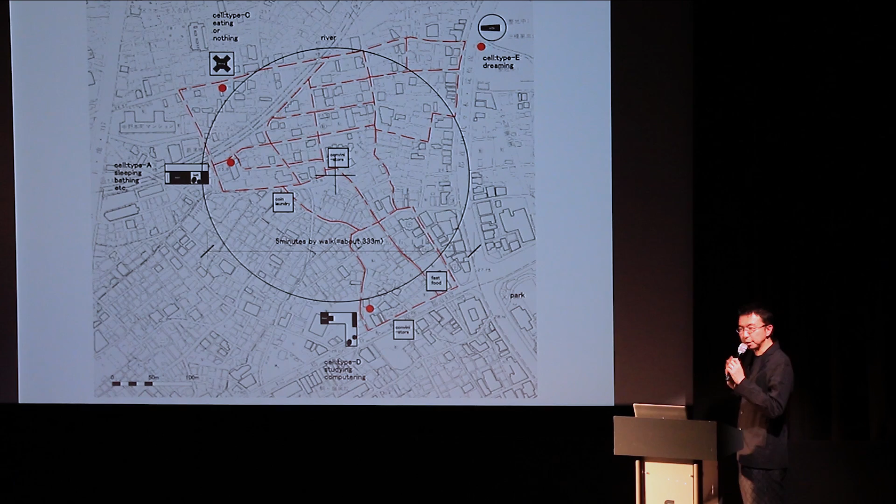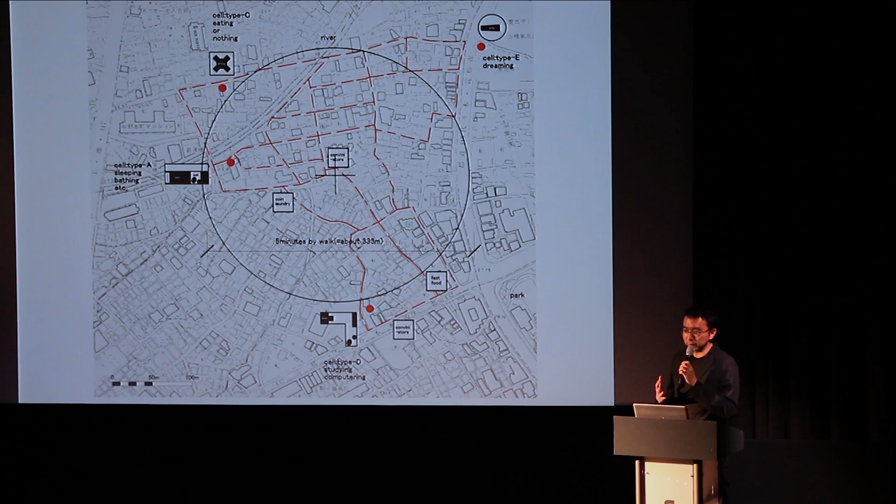And this is the first project. It is really conceptual, and it was designed in 1997, I think, to think about a new concept of the house. And you can see, simply, we can say, live in the city, or the whole city is a house.

This is the map of Tokyo, and the place where I was living around that time. It's just out of the Shinjuku area, and you can see residential areas with many, many small timber houses with such winding small pathways going around. And the concept is very clear.

You have not one completed house, but the house is fragmented, like a Moriyama house, but scattered throughout the whole city or neighborhood. This is, I think, from here to here, about 100 meters or 200 meters, something—so it's completely walking distance. And then some area you have just a dining room, and some areas the study areas, or some bathrooms, or some other things.

And of course, not only your own small places, but you can use the small shops or small cafes or anything you like throughout the whole city. So your life is like, of course, waking up somewhere.

Maybe this one is bed, I don't know, already it's more than 20 years ago. But woke up, for example, here, and then take a shower here, and take to work, to think about architecture here. But the important thing is walking around in the city during your life.

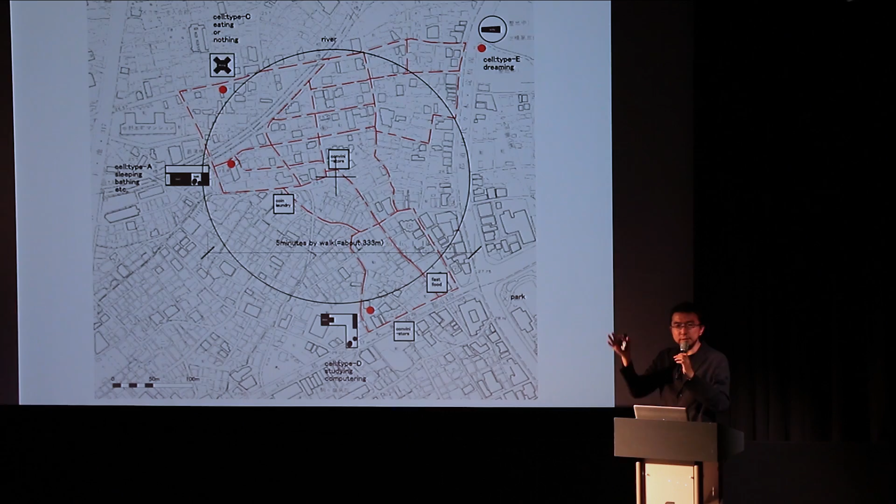But of course, during walking around, you will meet some people, and not only friends, but some other people. So the house is not defined by one object or one boundary, but it's more melting into the city. So that was the very, very basic concept.

And actually, at that time, this kind of thinking was not completely new, because Toyo Ito already talked about a city like Tokyo being like a house or place of life. And then you saw the small, like a PAO, small furniture-like spaces where Sejima-san was there in the photos. It was like the concept to live in the city without such strong enclosures. So I was, of course, influenced by that kind of thinking.

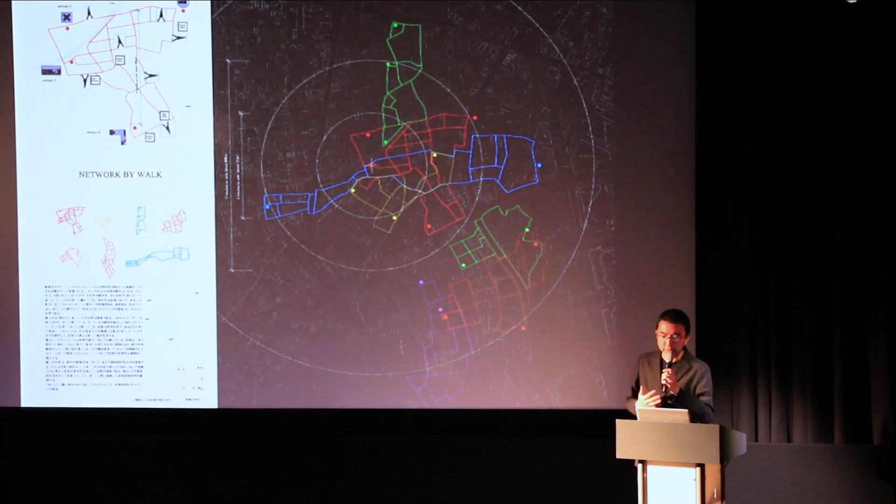But at the same time, I got an inspiration from my actual life, walking around in the city, small pathways. It was part of my life, and I felt it's kind of a nice, cozy feeling. So that was the very, very first, and this one is the concept.

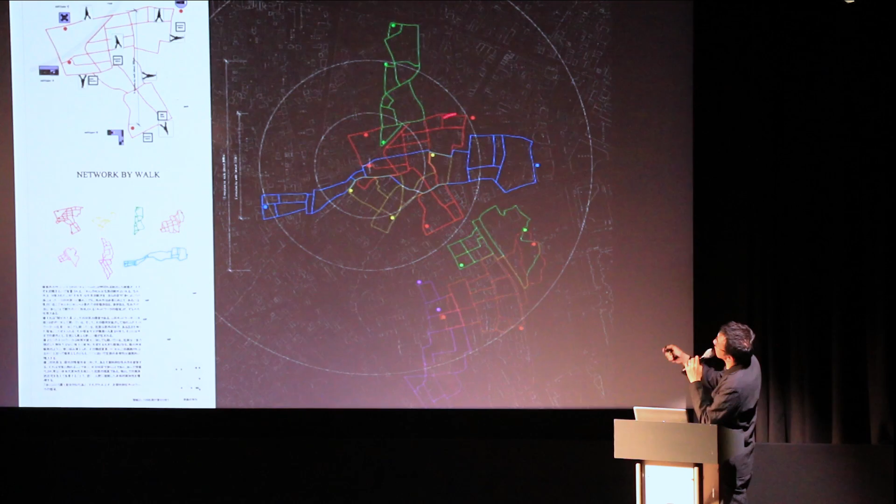Each different color means each different house. Red house, this place, and then of course, the walking pathway should be much more almost undefined. But I just drew it in different colors. These blue guys, like this.

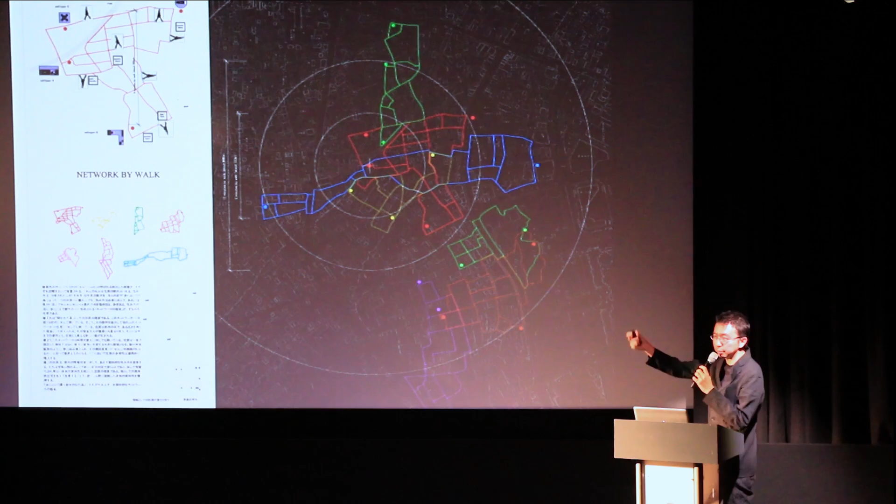If you have one space, another space, and then some other space here, then your house is really extended into the city. Because Tokyo City's residential areas are quite intimate, and within walking distance you can have almost everything. So this kind of thinking was possible.

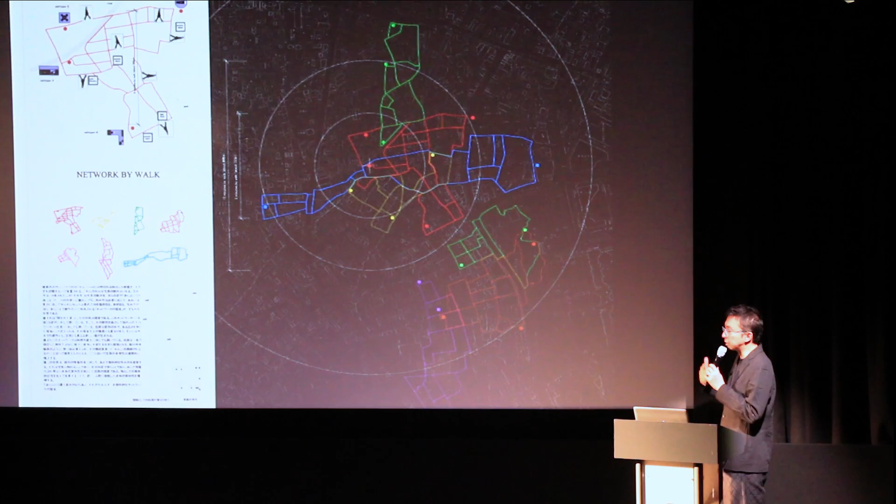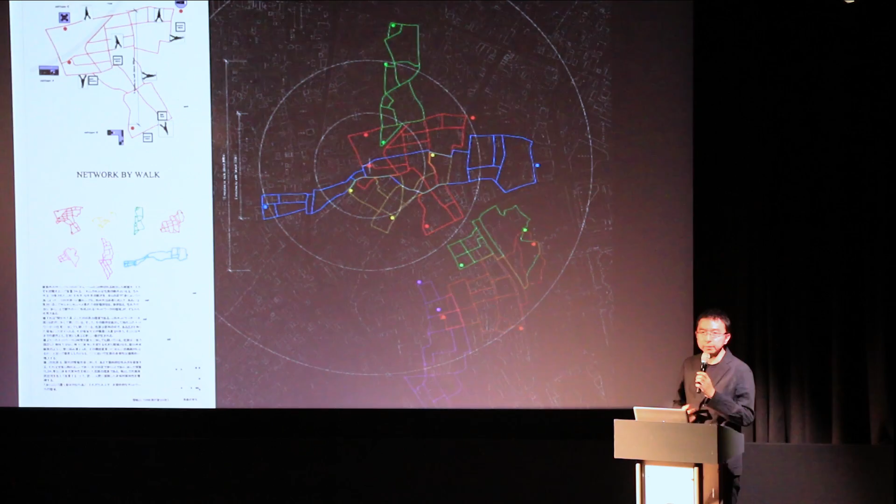But I tried to extend the idea of the house to the limit, I think, to where the architecture is not anymore and is melting into the city, or how we can redefine the place for our dwelling. So this kind of conceptual thinking was happening there.

As I said, even the street is quite cozy, surrounded by many daily stuff of other people. So the atmosphere is like you are not going out of the house, but get out of the room, while still walking some part of your house.

Especially, it was a great contrast to my hometown in Hokkaido. These are really cold places with heavy snow. So once you get out of your house, suddenly the strong nature is there. So the contrast between inside and outside was so strong in my hometown. But in Tokyo, the climate was more mild, and the scale between inside and outside is not so different. So that is why I started to question how to make such blurring boundaries.

And of course, it is from the traditional things. As you know, we have that kind of layering in between spaces. People call it engawa. It's like layers with no strong boundaries. The boundaries, like paper sliding doors or canopies, indicate kind of boundaries. Sometimes really thin frames are making the boundaries.

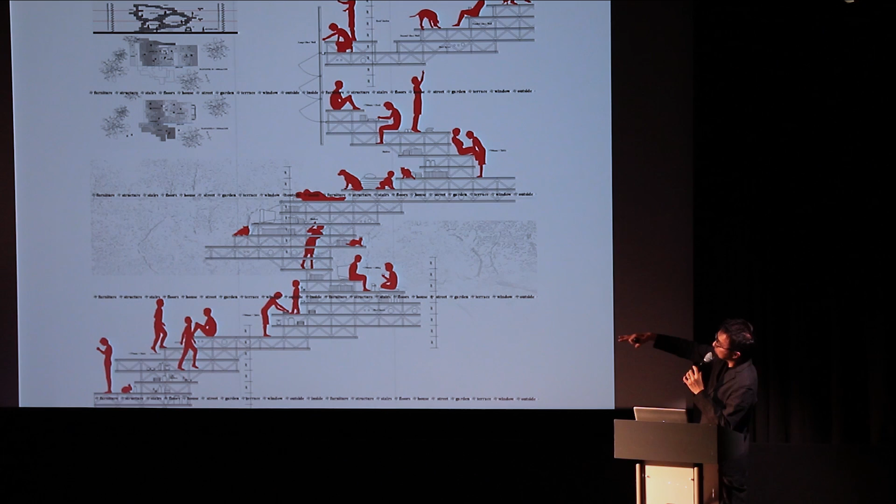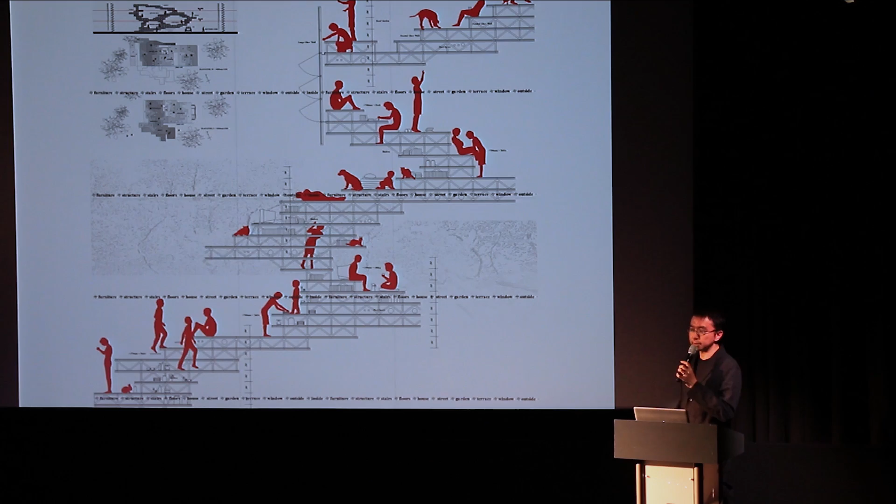Everything is like, at that time, 35 centimeters. And then you sit on it, or you use that size as tables or shelves. So there's no clear function, but you can find every different kind of function within the interactions between your body and the spaces.

But I realize this is only possible in cultures where you take off your shoes and step onto the floors. You can see this is tatami floors, and people sit here. This is a table, but they also put chairs, and then put some other tables. So you already have multiple levels, and mostly the floor is floor for walking, or nobody stands on it because this is a table.

But you see those multiple layers of levels could work sometimes as a table, sometimes as stairs, or sometimes as benches. Then I felt that is quite a simple re-understanding of the Japanese traditional systems, but could be something beyond normal functional architecture.

And this is one of the scenes from a Japanese film. You can see they are sitting on the floor, she's sitting on a chair, and she's sitting outside. So those kinds of natural, multiple layering behaviors are happening.

Or sometimes, yeah, could be lying on the floor. So for us, the multiple levels of your house, once you take off your shoes, then it could be more flexible in a sense. So those kinds of thinking inspired me to make this house.

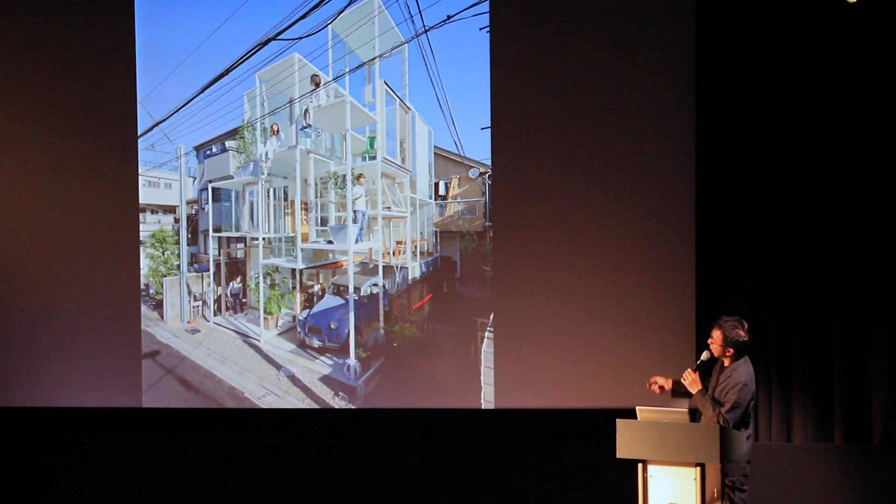The plot was very small, as you can see, almost less than 6 meters by 9 meters, or more or less. The clients, of course, understood this is a super small plot, so a normal house doesn't work. So how to deal with that?

At the very beginning, we just chatted about their lifestyle, what kind of life they do. They said, casually, not like a serious talk, that they are like nomads in the house - not in the world, but in their house. They were living in a typical apartment with dining spaces, living spaces, bedrooms, or something like that.

But they said they don't care so much about the name or function of the rooms - they just sometimes choose one corner of the dining space to read magazines, or some corner of the bedroom to find their place. And I thought, wow, this is a really flexible, nice way to live their life, much more free from the plan of the house.

So I thought, anyway, this plot is quite small, so we can just give up on the size of the spaces, but we can try to achieve varieties or diversities of the areas. Then they could choose as they like - just a small corner for some purpose, and a different corner for something else. If you have varieties, then the house for them could be much richer than the size suggests. So that was the very starting point.

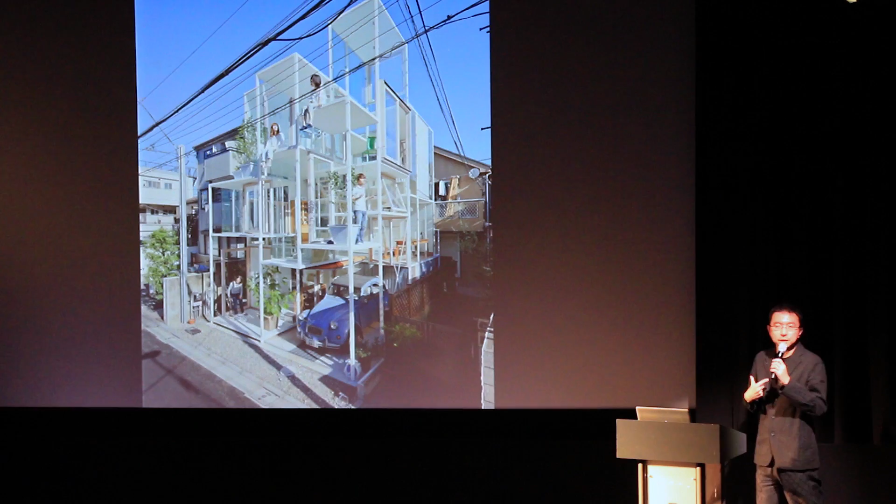And this house itself, of course, everything is small, but many floating pieces are creating your territories. In that sense, this house is not only talking about the physical relationship of the space under your bodies, and not only about the functional or something beyond function, but also really relating to the urban context of Tokyo, like a translation of the city of Tokyo into the building.

So that is why, even from outside, you will see it, and no other houses are like this, but you feel, wow, this is really like a Tokyo feeling.

And this transparency is a bit too much, I feel, but the clients like that. So sometimes the client is much more aggressive than the architect. Like the Moriyama house, also a huge inspiration to Nishizawa-san, I think. But in this case too, the first conversation inspired me to think about those multiple level houses and those transparencies.

They also talked about the openness, and of course we could put some walls in some areas — the western areas we have more walls to block the western sunlight. But then we talked about, yeah, we could have more walls if you like, so however much you like, and we could make a good balance.

But they said no, this kind of openness is very nice, and even the bathrooms could be almost open — but the bathroom means showers, not only the toilet spaces. We put it in boxes, but we didn't show it in the models. We have one layer of the box, the storage and the toilet, on the very back of the house.

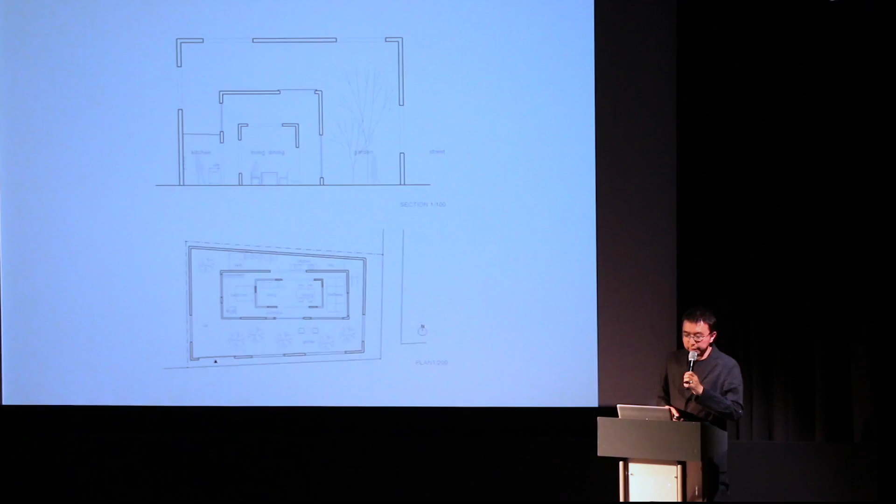And finally it was like this: just 3 simple boxes. Big box, middle box, and small box. This is a plan, and around here is outside. And then the section is also like this.

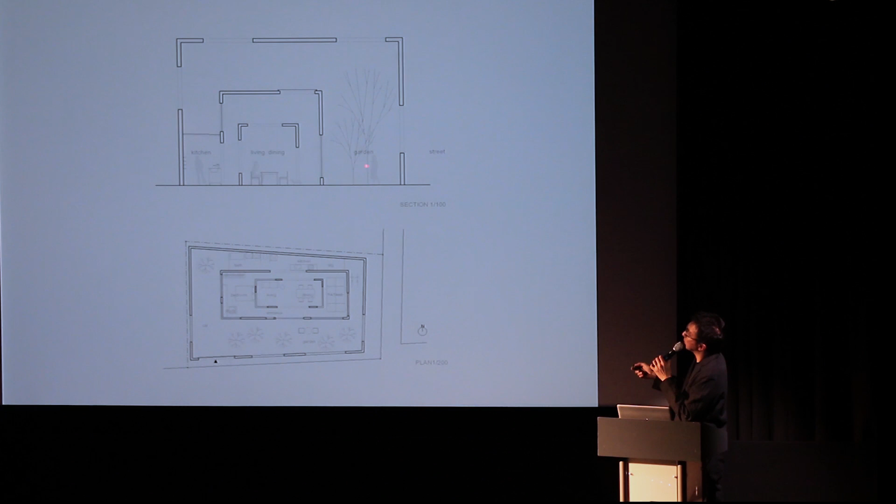This section is really amazing, I think, because normally this big box is not necessary. You can live within this box. But if you have this big box, then of course the garden is here, but the garden is part of your room, a larger room in a sense, but really open, larger rooms. And this inner room is also not so necessary. But if you have those kind of 3 layers, then you can have amazing feelings of varieties in your house.

So we proposed - okay, the house, garden, it's okay. But if you enclose everything with one more skin, then you can feel your gardens more within your territory. Sometimes the garden itself is part of a larger, or the largest, living space. And if you like to get more protected, then you have 2-3 layers to protect you from outside.

And this is a view from the outer layers, already enclosed by the big box with many openings with trees, because this is outside. And then you see the second box and the third box inside.

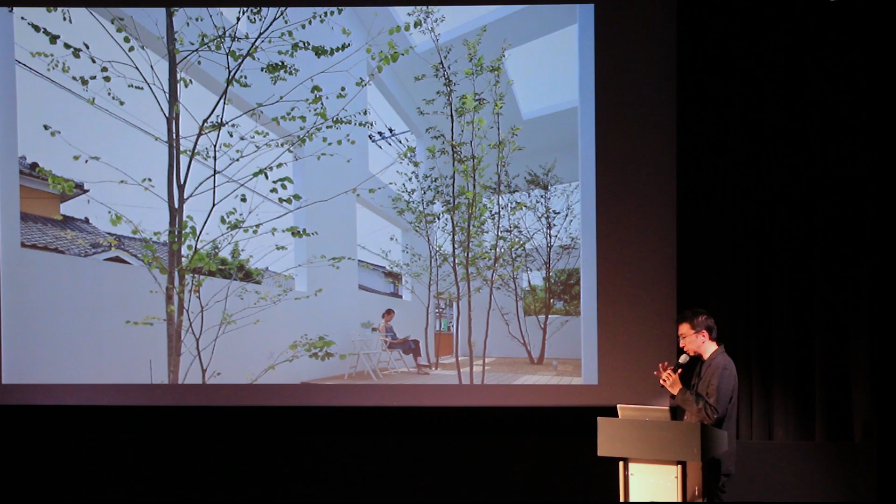You can choose in your life how much transparency and opaqueness you need. Again, this is a space inside of the big box, but outside of the middle box, so it is outside. The layout of the openings is carefully designed not to be too open to the street and not too open to show neighbors' houses, but taking in the neighbors' greens, and then to open to the skies. The treatment of the boundaries is quite fundamental.

So in a sense, this house has no plan, just a box and box and box. No plans, we just design the boundaries. But if you design the boundaries, then the whole space for your life could emerge from that. Of course, we can say the concrete box is making your house, but at the same time, we can say the thickness of the air is making your house. The wall is not just an object as concrete, but the thickness of the air is making your wall. And the air, and the openness and closeness, is really dynamically changeable. So in that sense, this is really close to the traditional Japanese house, but at the same time really questioning not only the Japanese traditions but the whole fundamental question of architecture or dwellings, how to open it and how to close it.

When I got the commission of this by telephone, I was so excited because they said, this is just a small thing, so I'm not sure you can get it. You'd like to get it? Well, what is it? And they said, the public toilet. Wow, this is... and how many toilets? Only one? That is kind of an extreme situation.

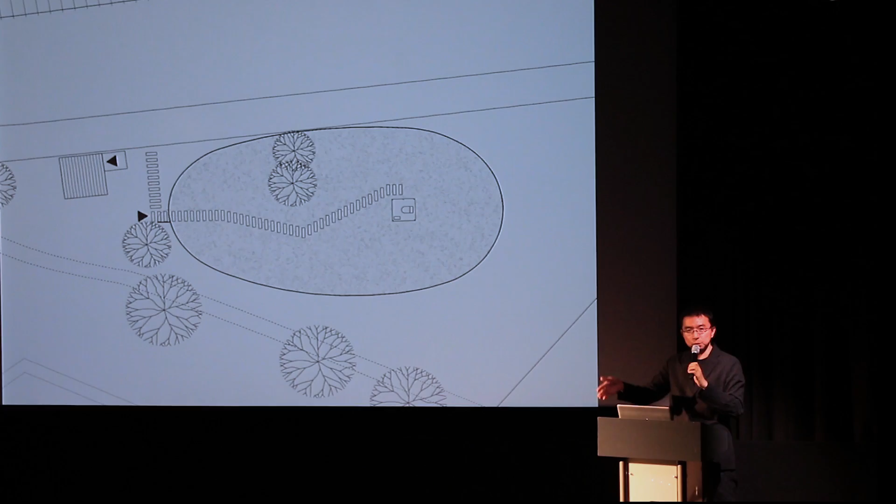Normally the wall blocks the view and blocks the air at the same time. But if you can separate the meaning of the wall, blocking only the view, blocking only the air, then this black wall is only blocking the view, so the air is continuing. And this glass wall is only blocking the air, to make a minimal shelter for the rainy days or something, but not blocking the view, so you can have the view. The important point is to make distances, like the previous project: three layers of boxes, box and box and box, but with distances between them, then you can have spaces.

In this case too, the functionally different walls could have distances, solving those impossible requirements like blocking the view but enjoying the view to the surroundings, or making it public but really private. Those kinds of contradictions could be solved by such an intellectual method. And then finally, it's built, and it works very well.

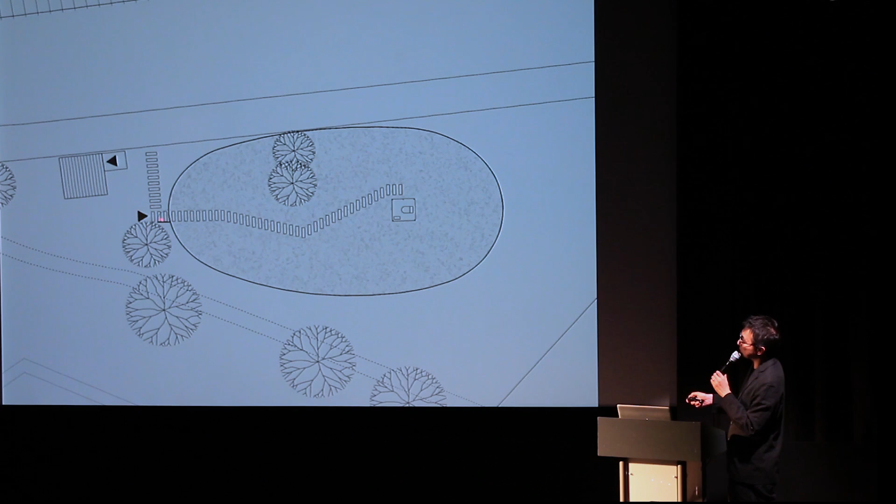Of course, in really emergency situations it's a bit tough, because you finally reach the door, you open it, and then you still have 15 meters to run. But most of the time, it works.

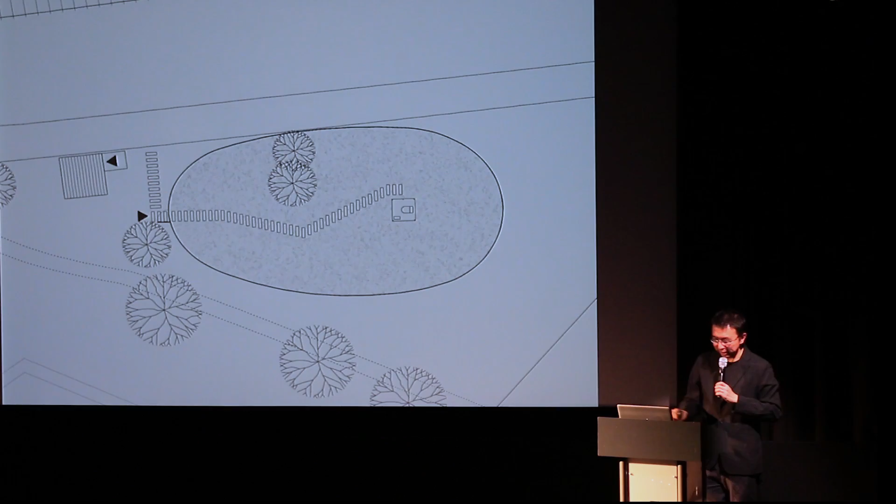We kept the existing trees and made this garden as natural as possible, not too fancy, to create a nice continuity with the surroundings. But it's really a public toilet. It was done five years ago and it's still there, but it was made like art. The city itself promotes itself through art and architecture, which is why they asked me to design this small toilet.

Every year they hold an art event in the springtime, and in the first year, because of this crazy toilet, the place became really popular. Many people came on huge buses, not just one but two or three touristic buses, parking behind the walls and making a long queue, not for the toilet, just to take photos, sit inside, and take selfies, like a touristic place. It was nice, and the city people were so happy.

But sometimes people on the bus whose next destination was the toilet thought, okay, it's next to the toilet, so I'll use the toilet. Arriving there, it's actually a toilet, but there was a long queue only for photo shooting, so they couldn't use it. They got a bit angry because this was supposed to be a toilet, but they couldn't use it as one. They complained to the local government, and the city government people thought, wow, that's a big problem—how do we deal with this?

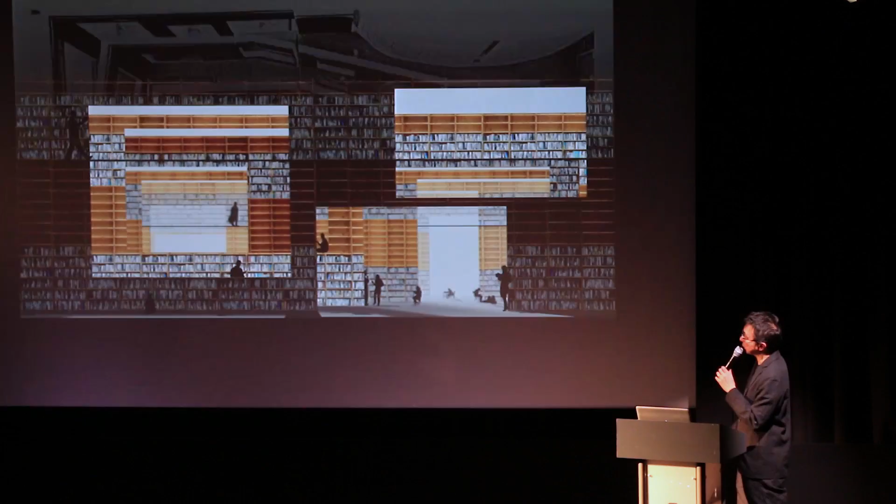This library is also about boundary things. It's made entirely by bookshelves—everything is bookshelves. This is for the Art University in Tokyo. The bookshelf spirals to grow and create places for people. Finally, it's a 6,000 square meter library made only of one continuous bookshelf. The important point is it has many, many openings again, like the House N, the box and box and box house, because with these openings you see the next spaces, like a layering.

I thought, of course, a library should really be a functional space to find and read books. But at the same time, I personally felt the library could be a space where people can just meander, walking around like in a forest, for unexpected encounters with unknown books or to get unexpected ideas. So on one hand, it's a super functional library, but on the other hand, it's almost a space beyond function, a place for imagination. How to integrate both of them was a very interesting topic for me.

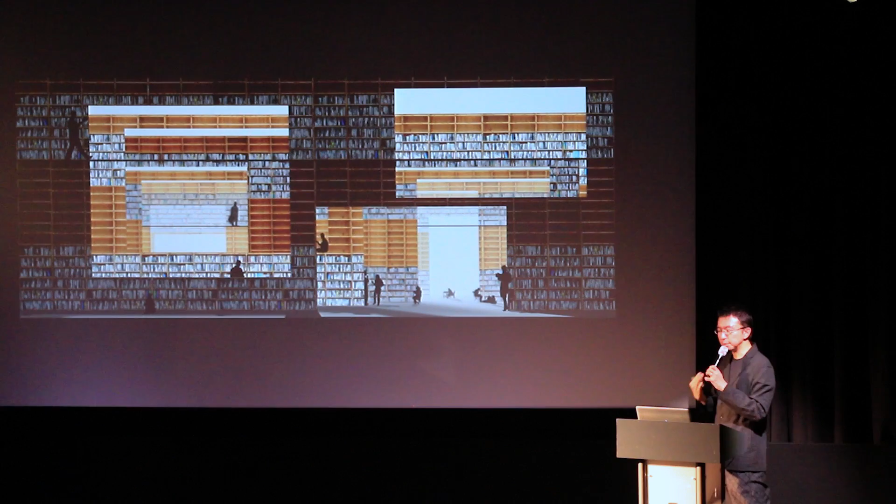I thought about a forest of books where you can walk around. The layering of bookshelves with many openings lets you see the space behind, and behind that, but you can't see everything—only limited areas are visible. You understand something is behind it, but you don't know what it is. This creates curiosity, invitation, and expectation, making you want to start walking around.

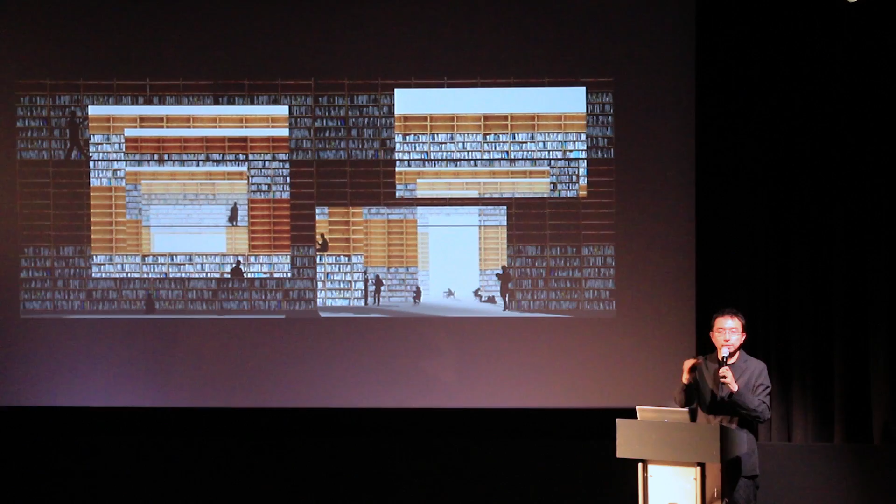But once you step into another space, you see another layer, and almost endless layers. Those endless imaginings, curiosities, or expectations could lead you to walk around almost endlessly, like in a forest—because in a forest, you feel it spreading, but you don't know what is happening behind those trees.

That is why you're walking around. So those kinds of sequences of curiosities should be created by those layering systems. And then this is the model, 1 to 20 model. It's a very huge model.

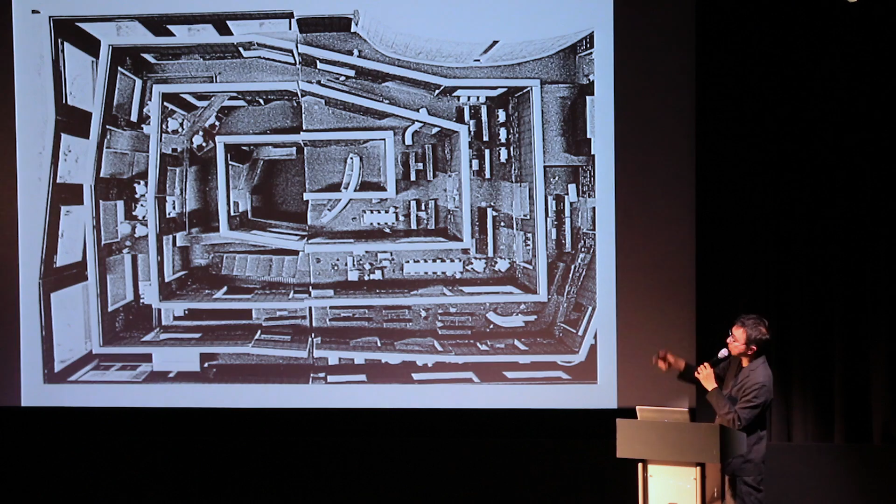Functionally, of course, the layout of the books is quite systematic. This is a central counter, and then it's like a clock. Each category makes those kinds of layout. You quickly understand if you look for books on art, then that direction is the art books, and you start to follow that, or the literature or architecture or something. Everything is really, really well organized.

But still, it's like a labyrinth. So if you don't care so much about the categories of the books, then you quickly start to be lost in the spaces, in a positive meaning. And then finally it's made so that it's not dealing with boundaries inside and outside, but it's almost like endless boundaries. No outside, no inside, but it's like relative boundaries, inside here and there. But if you are there, then there and over there is happening.

And the ceiling is really nicely done with really cheap polycarbonate materials, to make a beautiful contrast with the timber bookshelves and natural light, and almost like a phenomenal existence of the surfaces.

And seriously, I like to say those kinds of comfortable feelings are made by this system of the spiral, because the space between those two walls is almost like 4 meters something. So it's rather like a residential, cozy scale, cozy feeling.

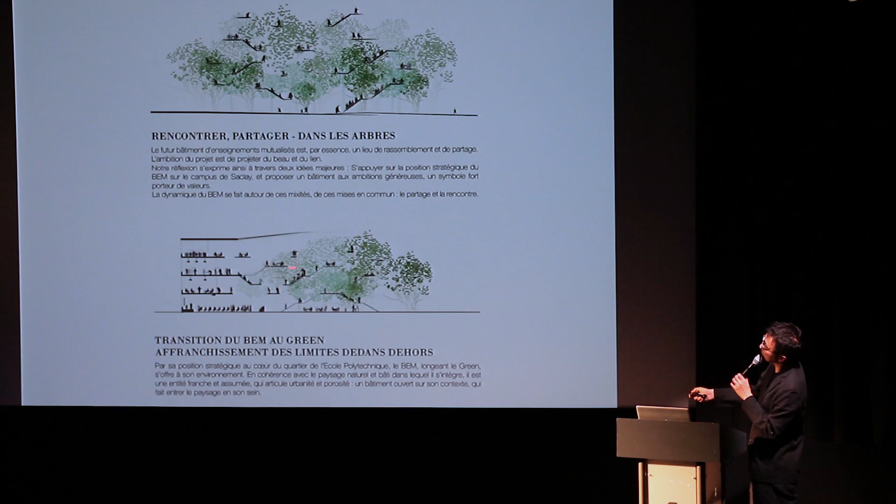And this diagram below is getting more to reality because they request many classrooms. So this is the classrooms, corridors, more open areas, and then it starts to get more random. And then we have more trees, even inside we have trees. So it's almost like melting into the forest. And in the forest, you can be more dynamically communicating.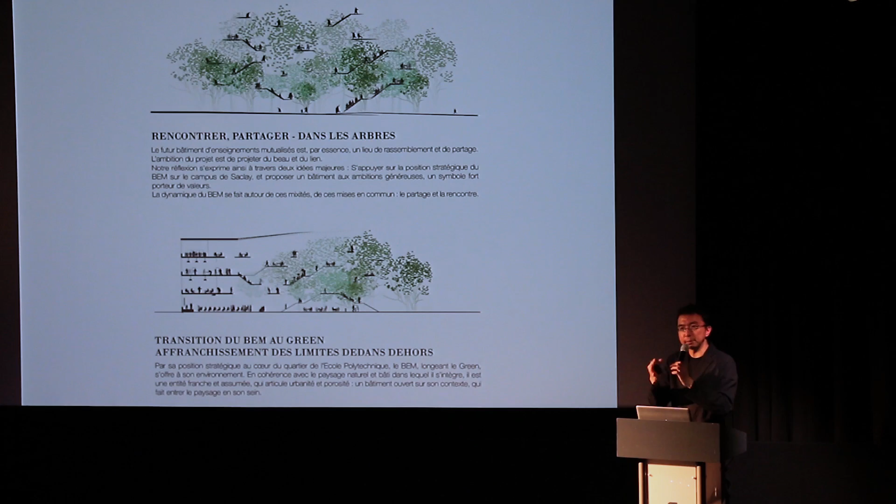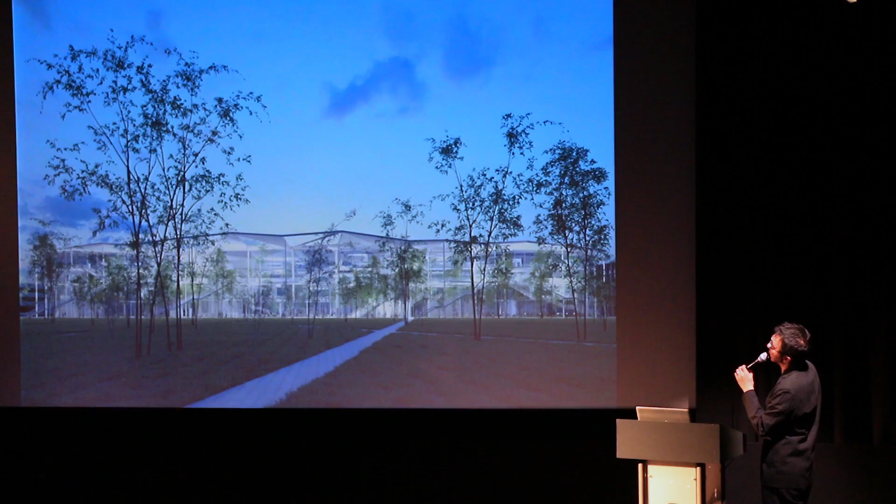So this is the actual sections. Conceptually it's almost the same thing happening. From outside, it's like this. But you will see how they need so many normal classrooms, so we put it there.

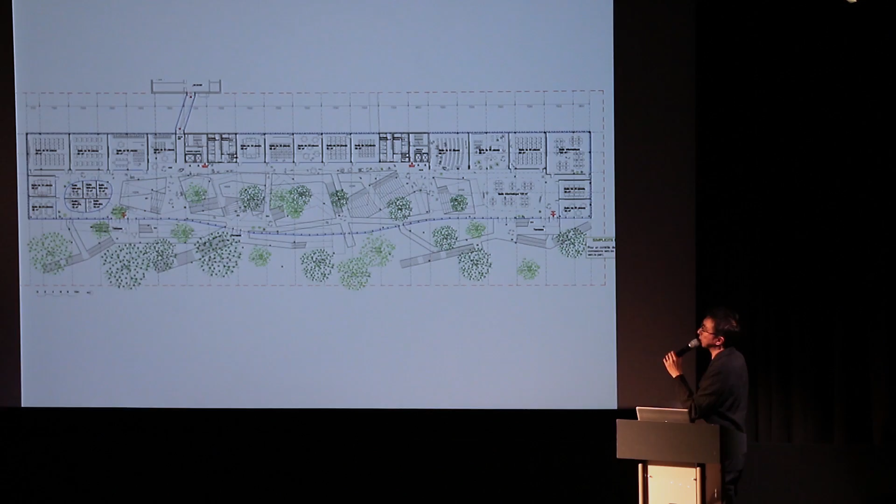And then we proposed those kind of circulation areas. All the circulation areas are like floating platforms and flying catwalks, and then big staircases like the floating auditorium. And then again, vertical relationships, horizontal relationships happening like this.

This is now the last phase of the design, and hopefully we can start construction within this year. The size is almost 10,000 square meters — not just 10 times, but much more, almost 100 times or something. But still, how to think about the relationships of the people, or the spatial layout, and how people's experiences could be related. In that sense, with different scales and different programs, we can still think about the continuity or consistency of the concept.

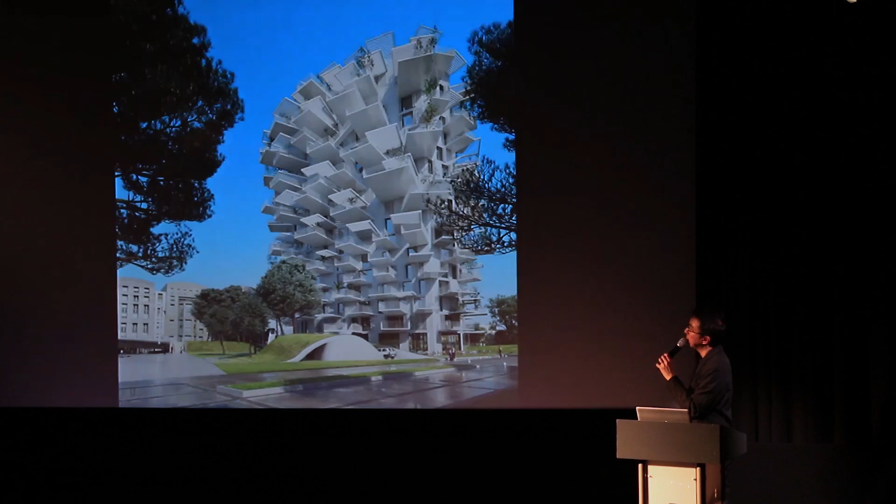And this is the housing project in France too, in south of France. It's like a crazy monster of balconies, because this is the south of France, so the weather is so different — warm climate — and even in the winter time they could have lunch on the outdoor terrace. That is something so different from, for example, Tokyo situations.

So I tried to imagine what life is like in those really nice areas. And then finally we thought, wow, a huge terrace should be there. But how to do it? And finally we put huge terraces on the apartment. That's quite simple, but it works.

This is alongside the river, 50 meters high, with 105 apartments there. This is the plan, the site is like this. So we simply respect the green belt going through the site like this.

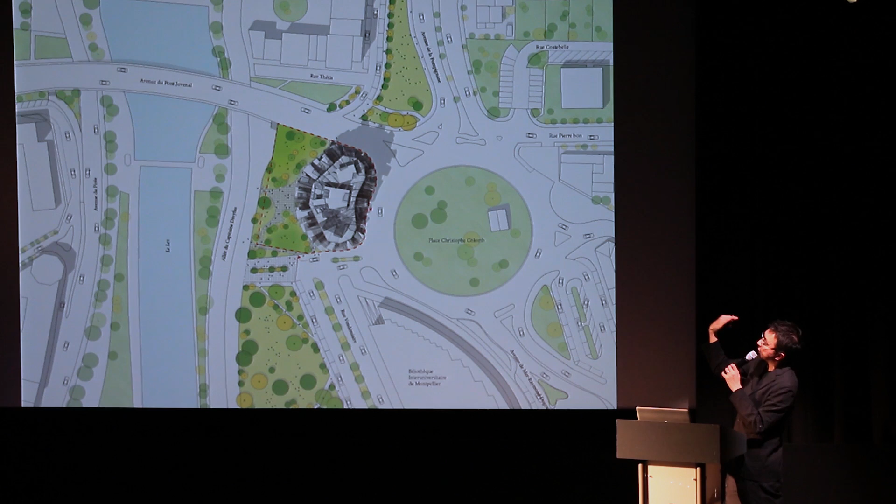So we push the buildings more onto the roundabout, and we try to respect the view of the existing buildings as much as possible. So we push this angle in and something, and finally we achieve this kind of strange shape. And we didn't know how to deal with this strange shape.

But we got the idea to put huge balconies all around these volumes. Of course, it's quite like a normal typology, an apartment with balconies. But if you have the proper shape and a strange proportion of huge balconies going all around, then based on such a normal typology, something really different, something really new could happen. That is the point I love this project very much, because it's quite normal, but it's quite extraordinary — anchored to fundamental things, typologies, yet something different.

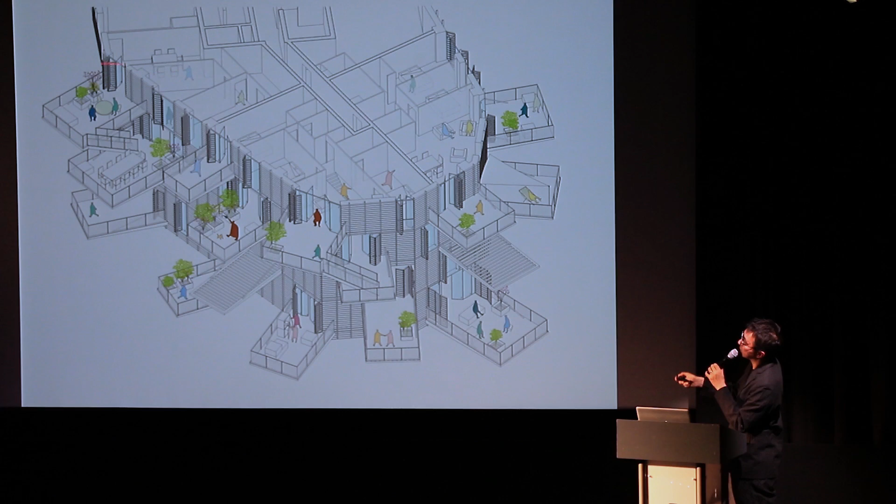And you can see sometimes the apartment is a duplex, two levels, and the balcony itself is two levels, connected by a staircase. So it's really like a three-dimensional living environment. I don't know how my former works are influencing this project, but you can see — this is now under construction — after completion, the building itself will be very beautiful, I could say.

But the much more beautiful thing is life coming out onto these terraces, parasols, furniture, and all of those daily stuffs, the stuffs of life, are covering these architectures. And then finally, the architecture steps behind, and all those kinds of three-dimensional high-rise filled with life could be there.

And that is the point really amazing things could happen. It's like the Tokyo street. The street itself is just one line, but you have many, many things coming out, like life is coming out. And finally, it is making the living environment. So in that sense, I feel there is something consistent.

I really like to respect the local conditions, the climate, cultural background, and lifestyle. Based on such local conditions, it was something new for me. I try to get inspiration from that kind of new thing, try to understand it, and try to translate it into architectural forms. So that attitude was very much the same. When I came to Tokyo, I was surprised, but I didn't want to say I don't like Tokyo or this is crazy. I was curious. I like to understand, I like to respect, and then I could have something for me to retranslate into architecture. So that basic attitude is here, I think.

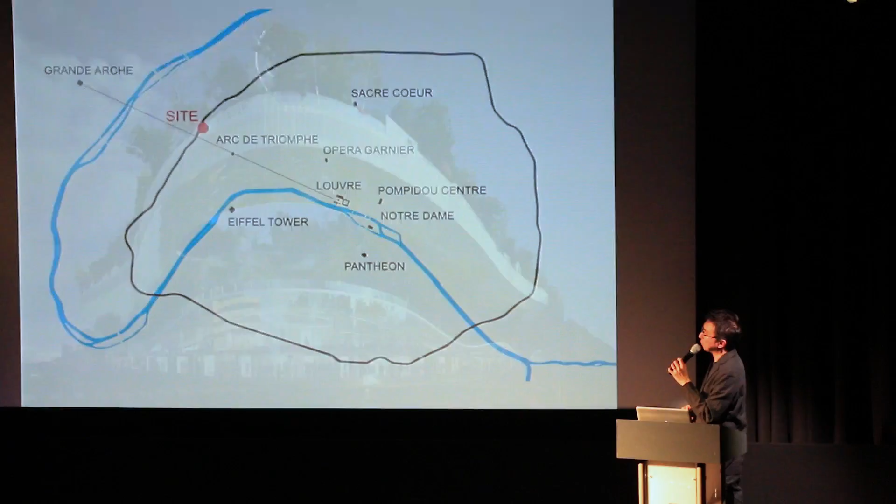So this is the last one. In Paris, in French, this means 1,000 trees. It's like a floating forest above Paris. It's such a crazy shape, a crazy concept, but we won the competition, finally, against Rem Koolhaas and 3XN and such great architects. I don't know the exact reason, maybe many reasons, but of course I said I love Paris very much at the presentation.

Yeah, this is on the highway. It's in a very important location. This is Champs-Élysées, Louvre, and La Défense, and this is the ring highway. This is the crossing point with our plot, so you can see it's on the highway. But the important point was this is on the edge, but actually still in Paris. So how we propose something new in Paris, that was a big challenge.

As you know, the city of Paris has a height limitation of 30, 35 meters. So mostly it's continuous low volumes, sometimes with the Eiffel Tower or something sticking out, but mostly it's like this. Our site also has height limitations. So we thought, if we have floating forests just above those height limitations, it could respond to the city of Paris's structure, but be really new. And if we have not only the forest but floating villages on there, some really crazy new lifestyle could happen, we thought. That was the real starting point of the proposal.

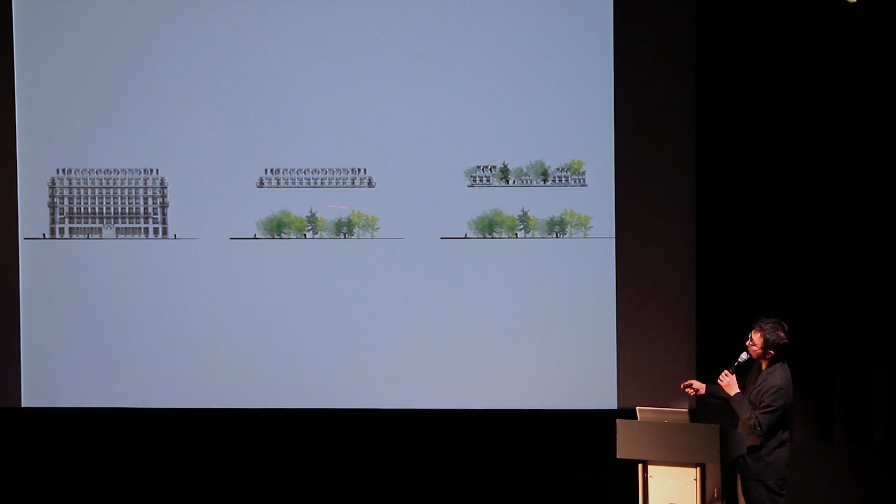A normal, typical Paris apartment—we open the bottom to make a public forest, and transform the upper part into forest-like villages. Because, you know, Paris rooftops are really harmonized but diverse. So we like to respond to that with different materials—harmonized but diverse, by the forest, floating forest, and the villages. It's almost like full greens.

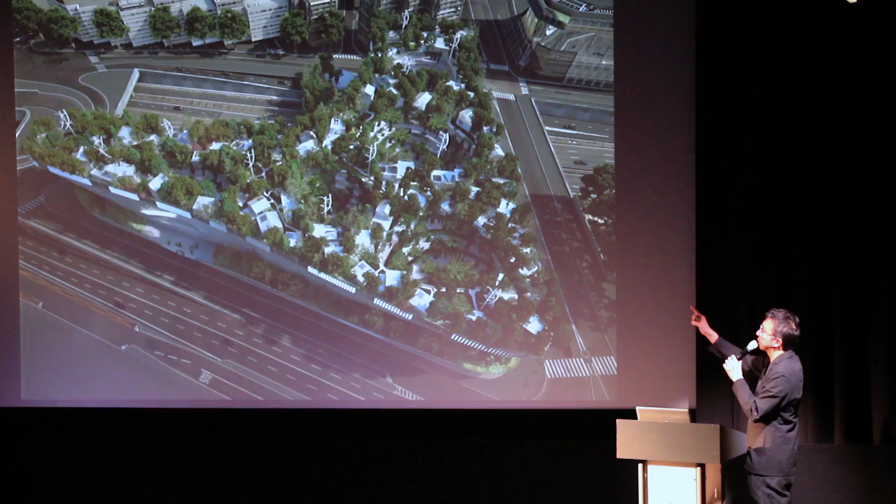We also wanted to engage with Paris as a city of monuments—the Louvre pyramid, the Concorde, the Arch of Triumph, and the new arch. So we propose a new monument, but not made of artificial materials, made by nature. That could also respect Paris, understand its history, but bring a counterpart to make both more shining.

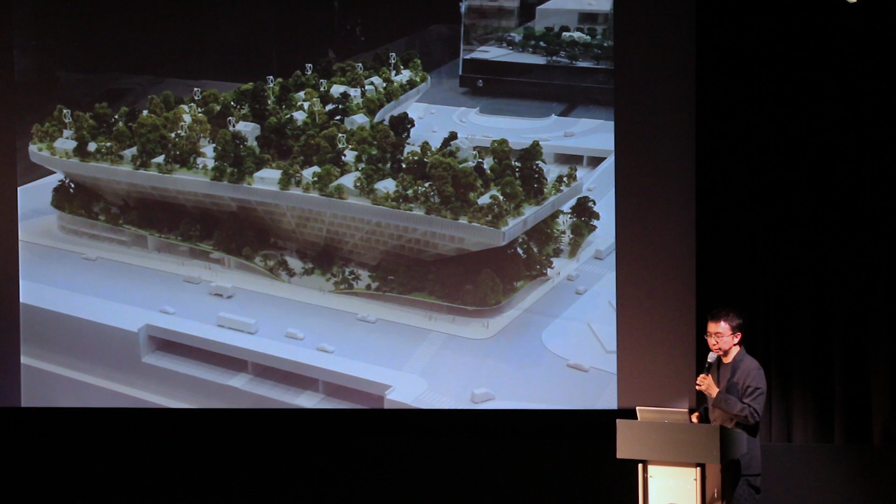This is the model, so you will see how the floating forest is floating. We have office, hotel, housing, commercial, kindergartens, and bus stations on the ground—really a mixed-use program. And it's huge, 60,000 square meters. So it's a new scale for us, a new location, and really deeply involved in the city of Paris.

I like to take a really basic attitude toward local situations and architectures. Try to understand and respect what they have, but also try to re-understand it to make new proposals. This is ongoing, and we will very soon submit the permission drawings. Of course, this is huge, so it takes time to finish.

For me, different scales, cultural backgrounds, situations and contexts always remind me of the day I moved to Tokyo. It was something new, but a really positively surprising place. When you encounter something new, everything is inspiring and your brain starts working a lot. Then you try to re-understand it, question it, and finally make your own reinvention or retranslation of those basic things to create something new. So scales and styles are different, but it's still continuing, still ongoing.